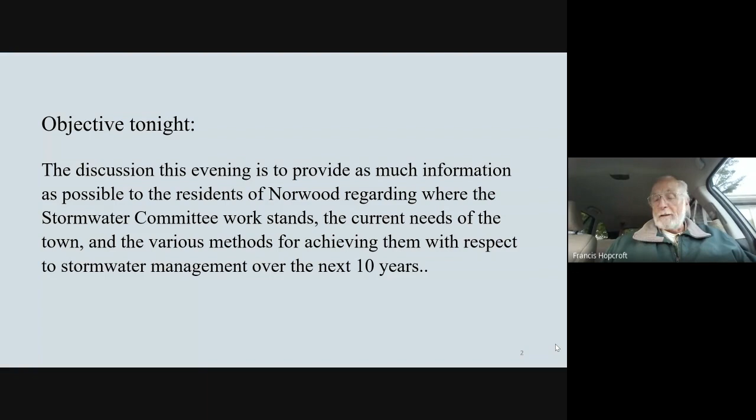So the members of the committee: myself, I'm a civil environmental engineer, registered in the Commonwealth. I've been registered in engineering and civil engineering since about 1972, in all 6 New England states at one point in my career. Heather is also a resident of the town and is a civil engineer.

Alan Slater is on the Finance Commission. Bob Donnelly is a selectman and also on the Capital Outlay Committee. Mark Ryan, the director of the DPW and town engineer, is a member of the committee. Holly Jones, conservation planner, Mike Rawson, the assistant town general manager, and we've had technical support and assistance from CDM Smith and Stantec. So that's the group that's been working to try to get this together.

Here is fundamentally the problem we're dealing with. If you look at the upper left of those 4 little pictures, you'll see that about 10% of what falls as rainfall onto natural ground cover, like undeveloped woodlands, is runoff. 40% evaporates, the other 50% infiltrates. That's really good. As soon as we start putting houses on and developing lots, even into lawns and gardens, we end up pushing that runoff up to 20%, and that reduces the evaporation and the infiltration.

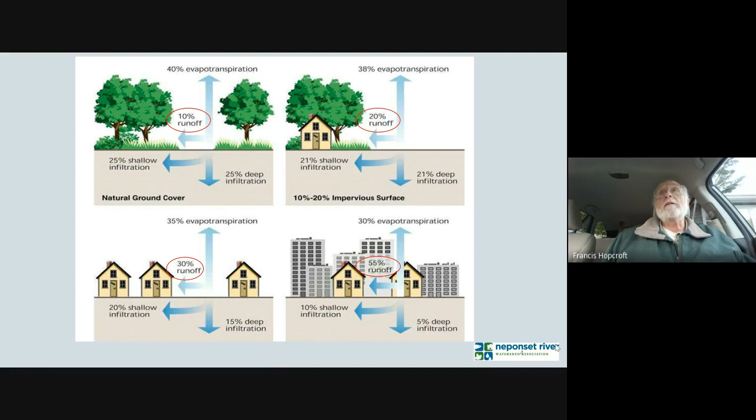As a point of perspective, when we talk about an area about the size of a standard soccer field, which is about 360 feet long, 225 feet wide, we're going to get over 12,622 gallons of water runoff in a quarter-inch rainstorm. When we make that pervious, even just a lawn, we're going to cut that to 1,260 gallons, 10% of what's coming off that parking lot. So it makes a really, really big difference in how much water goes into the storm drains and how quickly.

So impervious areas being increased with development is going to exacerbate the runoff, and waivers to land use planning and development projects also exacerbate the problem.

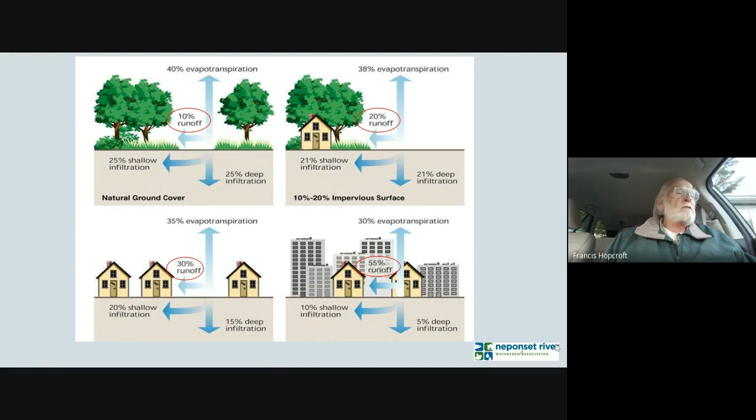There are some effects from all of that. We're going to have flooding, which we noticed the last time we had a major storm, about 3 years ago when the hospital was taken out. There was flooding underneath the bridge next to the public safety building, and a lot of flooding right downtown from Washington Street all the way down to Broadway and significant areas around there. That also causes significant economic hardship.

A lot of people had a lot of damage from that storm and had to repair it. Some of that is insured, not necessarily all of it. People who lost jobs because the hospital closed, businesses were disrupted - that's a lot of economic hardship on individuals. People's homes were flooded, had some disruptions. A lot of property was destroyed, and there was a lot of infrastructure damage in the town as a result of all of that.

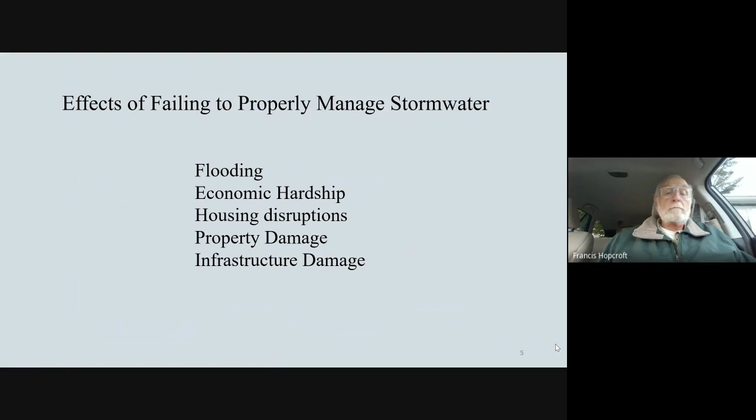In any event, there was a loss of livelihood for hundreds of people at the hospital and for some of those businesses, even if they only closed temporarily. There was a lot of loss of income for those places.

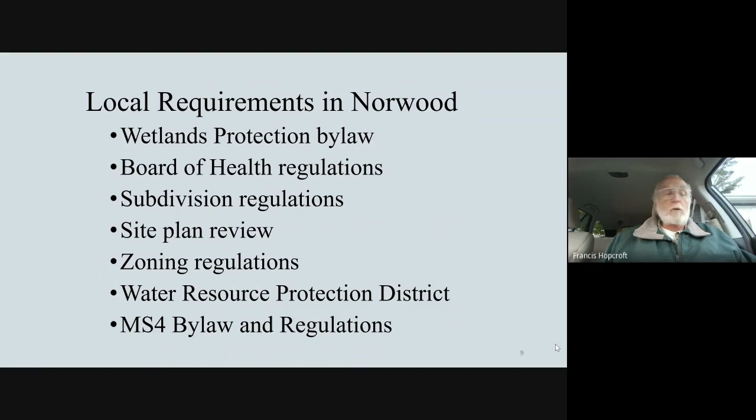The current issue: Norwood has identified a bunch of engineering solutions to deal with stormwater challenges, and those started with the original Stantec report, which was done a little over 20 years ago, and we have not implemented most of it. We now have to figure out a way to fund and implement those leftover projects and a couple others that have come up since then.

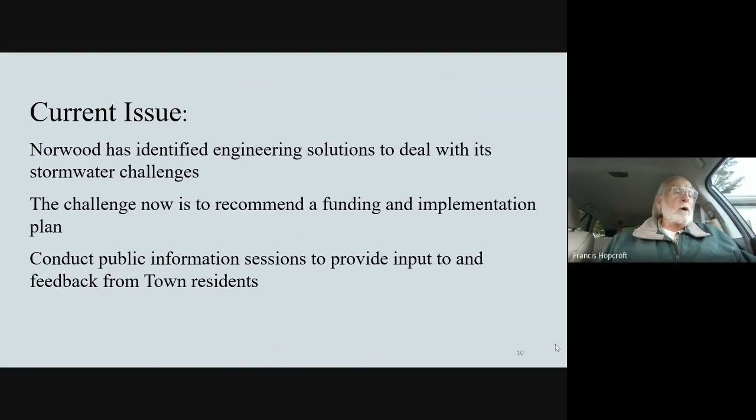We need to provide some public information, provide input to, and get feedback from town residents. Tonight is the first of those meetings, and we do want your input on these. It is important to note that homeowners, businesses, and the towns all have responsibility for effective management of stormwater. It is not strictly a municipal problem.

It's a big municipal problem, but we're not the only ones. As a town, we have to deal with it. Property owners and businesses do have a variety of options available to them, and some responsibilities along with those.

The first is to reduce impervious areas. If you don't need an impervious area, take it up. Don't build them in the first place if you don't really need it. If you're doing a patio, it can be done with patio blocks that let the water flow through rather than off.

You need to maintain appropriate, proper vegetative cover. Soil that does not have vegetation on it gets fairly hard when it's dry. Then the runoff is almost like an impervious area until the soil has time to saturate.

Sump pump discharges are a very big issue. We're not allowed to discharge directly into a storm drain in Norwood. There's no reason to dump it onto the driveway, which runs down to the curb and then into the catch basin and directly into the storm drain. That also is a no-no, and it should be removed.

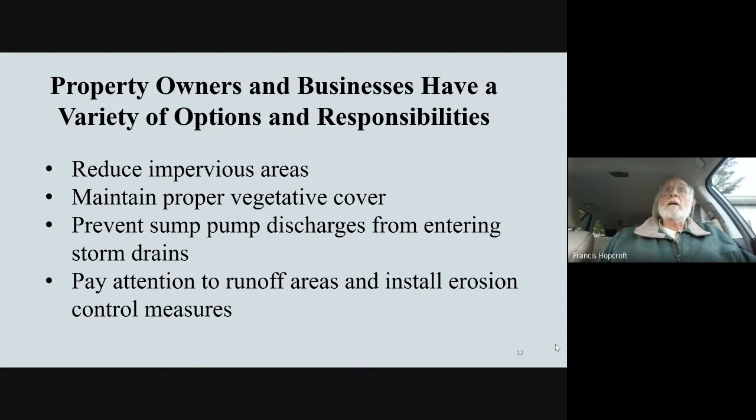Sump pump discharges should be discharging onto a lawn area that will not run off directly into the storm drain. Pay attention to runoff areas. Install erosion control measures so we don't create big gutters in the soil, which will direct water back into the streets. We need to pay attention to those things as we develop houses and do landscaping around the property.

The town does have some responsibilities. We need to provide and maintain adequate storm drain systems. We need to use swales, detention basins, rain gardens, and other low impact development when we do municipal projects and when we do planning for development projects. Those things reduce the runoff significantly.

We need to finish our development and implementation of the regulatory structures. We minimize deviations and waivers for existing regulations. I think I've said that about three times already tonight. It's one of my mantras, and it's a very important one to try to keep going.

There are a bunch of projects currently underway in the town. The DPW does operate and maintain existing catch basins and storm drains through its annual operating budget. Cleaning of storm drains and catch basins is a continuous problem, and it does have a significant piece of the operating budget dedicated to it.

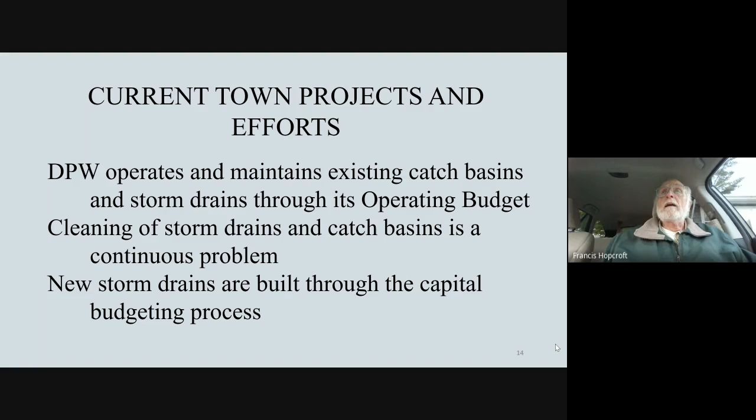New storm drains are built when the town has to do it through the capital budgeting process. When we have new developments, developers are required to install the catch basins and storm drains within that area to connect to the municipal system. But if we do it, it's a capital budget, and we all know capital budgets are tight every year. We have a very difficult time maintaining any kind of continuous flow. It's a very major problem.

The original Meadowbrook study was the last major study we did. There were about 9 major projects within that study. Only a very small number of partial projects have been completed. The first one was the connection from the public safety building in the Shores down towards the Hennessey Field system. There are a couple of smaller ones that were done over the years, but those are the only ones that have been done to date.

The Meadowbrook Channel project will be first. That one is going to be paid for through some ARPA money we have available. It's going to increase the channel below Murphy Field. Hennessey Field discharges into a pipe under Murphy's Field that then goes under Pleasant Street and discharges into the channel the Meadowbrook has been channeled into. Further down, the channel on Meadowbrook was enlarged by the Corps of Engineers a few years ago with work they did right at the Neponset River. So this Meadowbrook Channel project will increase the resilience of that channel, line it, and allow it to carry water more effectively into the area the Corps worked on, and then into the Neponset River.

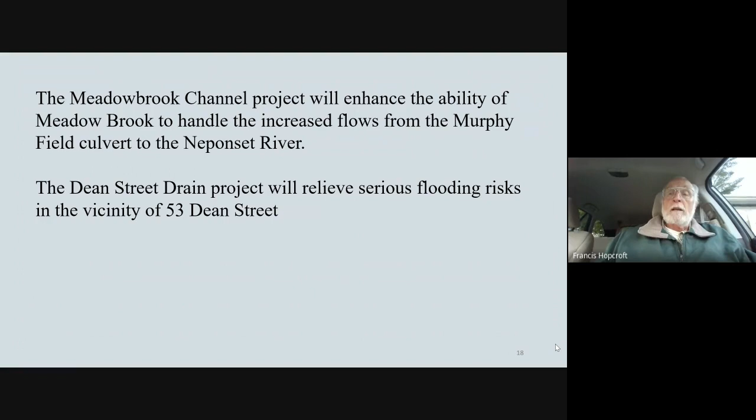Once we get that channel done downstream, then we need to deal with the Hennessey Field and Murphy Field project. We'll have a presentation from Stantec on both projects. Basically, the Hennessey Field project is a detention basin in the existing low area on the western edge. The reason is we cannot discharge more into the Neponset River than we do now, because that will cause downstream flooding. So we have to slow down the rate of water getting into the Neponset, and have big enough channels to optimize them.

The Murphy Field work will take water from the Hennessey Field holding basin and discharge it into the revised channel in Meadowbrook. Notice that the Murphy Field work will not disrupt the playing fields. Those pipes are outside the playing fields, between the playing field fences and Pleasant Street. We'll see that a little later on as well.

We'll then look to Guild Street. That picks up most of the runoff near and around the hospital site and the post office, and crosses under the railroad tracks at Guild Street and Broadway, ultimately connecting into the Hennessey Field system. Again, we're working from downstream upstream to get the best impact. The Broadway and Nahatan Street system picks up the water generated northerly and easterly of Guild Street within the Meadowbrook drainage area, and conveys it also to Hennessey Field, and then to the Neponset River.

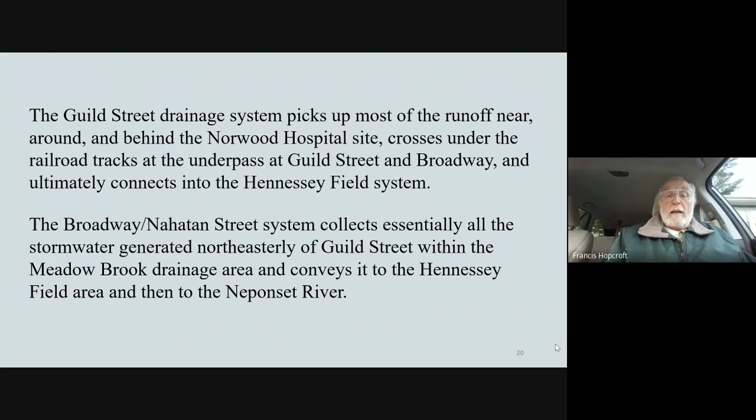Jacobsen Drive is a little north of Dean Street and west of Pleasant Street. It's a low area development that floods regularly. That will pick up the system there and tie it back into the Guild Street system, then into the one that goes under the bridge, and then into the Hennessey Field structure.

East Hoyle and Washington Street handles the areas north of Washington Street and north of Walpole Street, up Winter Street. It brings all of that water down into the same system. So there's a lot of water that goes into that Hennessey Field, Murphy Field, Meadowbrook system. And we have a lot of work to do to make that work efficiently and effectively without flooding people downstream on the Neponset River.

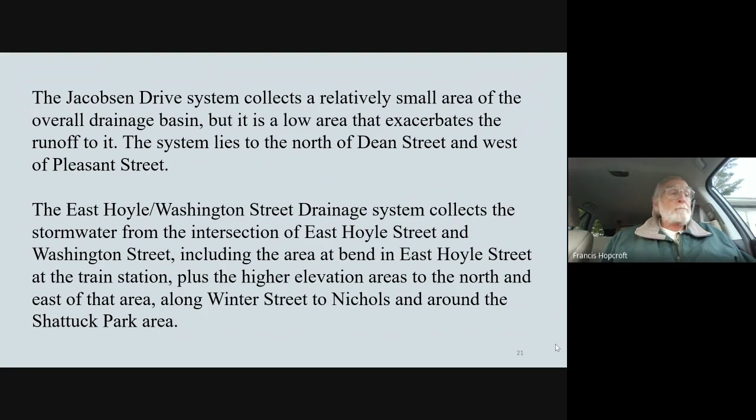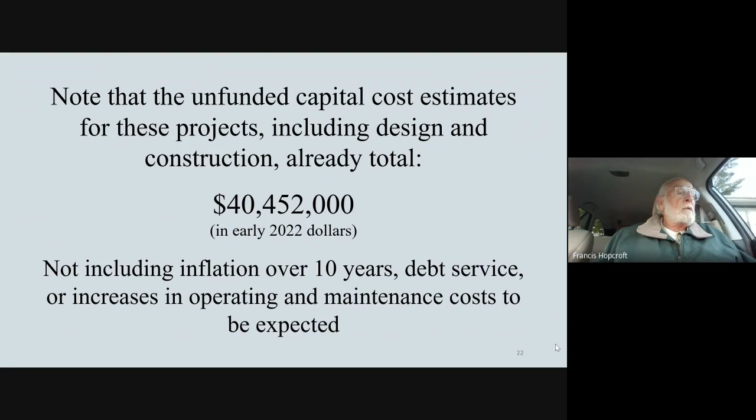One of the things we'll notice is the unfunded capital cost estimates for these projects—design and construction only—is over $40 million. That does not include inflation over the next 10 years, does not include debt service, does not include increases in operations and maintenance costs. So there's a lot of money coming down the road in the next 10 years to get these projects done. That's why we have such a significant issue in trying to figure out how we're going to get that done and how we're going to fund it.

What do we get for all that money? We get reduced flooding in the areas currently most susceptible to major inundation. The hospital is being built above grade without a basement this time. It is raised above all the water levels that occurred around it. That will not be a flooding issue again, but it could become isolated until we get these other projects done. The flooding we saw downtown will not be relieved until we get these projects done. The flooding in those other areas will not be relieved until we get these projects done.

This will reduce the risk of public safety buildings being isolated and inundated again, and minimize the risks for residences and businesses that have seen more frequent flooding—and there will be more frequent flooding as time goes on. We're looking to provide protection from projected storms for the next 75 years. Not all storms, but storms of the magnitude we just recently experienced.

Those storms will have bigger flows for the same design storm than we do now. Notice that all of this work will still not eliminate all flooding from all storms, or even fix all the known smaller flooding issues. So there will be more work and more projects coming down. We're in this fix now because we ignored a lot of these projects for the last 10 to 20 years. It is all coming back. Now we have to deal with it. And that's where we're at.

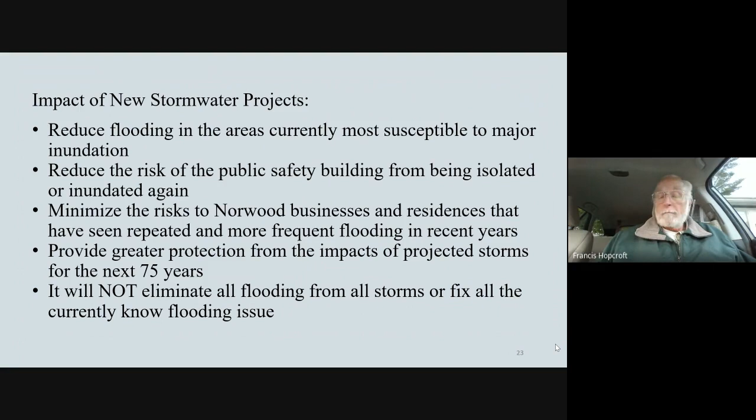We have to do something. There are some ways to finance all of this. Three of them are realistic, or at least realistic enough to be considered. The first is to continue financing all of these projects through the normal capital outlay process and the operating budget. You already know that's not going to work. We tried to do that already for the last 10 years. It hasn't worked out real well, as we've noticed recently. We're going to look at that again. That's going to be a very difficult thing to do without cutting way back for all the other municipal services that we provide. Same thing with the debt exclusion override. It impairs the ability to borrow, and it changes our rating for borrowing.

The third alternative is assessment of a separate stormwater management fee, which would be associated with what we call an enterprise fund, similar to the way that we do our water billing now as a separate fee. It's not part of the Public Works Department fees. Our sewer system and our sewer fees are done the same way. The light department is done the same way. So we're looking at the option of creating a separate enterprise fund in order to provide a separate management fee. We do not yet know the order of magnitude of that fee. It's going to depend upon what we put into the fee in terms of capital funding, only capital funding plus O&M, capital funding plus O&M plus management.

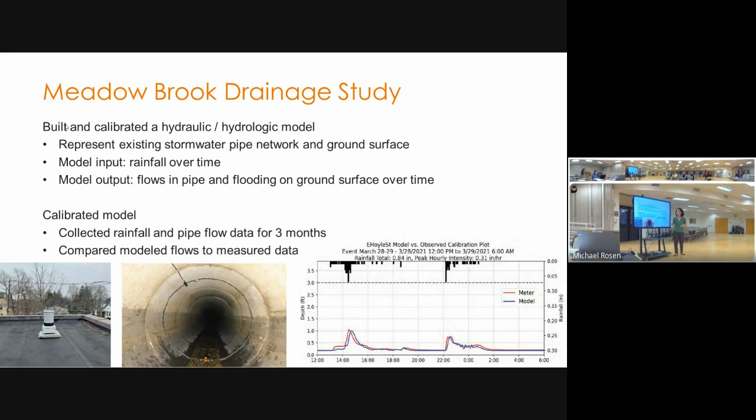So with this study, we did update the 2004 study, but by and large the drain system is the drain system, and the main branches are in the same location. So a lot of the projects that came out of this were very similar to 2004, but the difference is this study also looked at rain events considering climate change, because you don't want to build something and have it be obsolete in 10 or 20 years. We know a lot more about climate change today than we did in 2004, so the storms we designed for in this analysis were a little bit bigger because that's what we're expecting with climate change.

So we have a design storm, projected to the year 2070, a 10-year rain event—which doesn't mean it happens once every 10 years, but over a long-term period you can expect the frequency of returning to be 1 in 10 years. It could happen 2 years in a row, like rolling a dice: you have a probability of 1 in 6 of rolling a 6, but you could roll two 6s in a row. So this doesn't tell you how often it happens, just the probability of it happening. Then we evaluate how much flooding occurs in key neighborhoods that Mark was talking about.

So when we look at the flooding on the ground that comes out of the model in that event, we try to identify what we can do with the pipes to convey water away from those neighborhoods more quickly. We modify the pipes in the model, say upsize one of the main branches of the sewer, and run it again to see if the water clears out of the neighborhood more quickly, if the flooding goes down with the same design storm, and then look at how flooding changes.

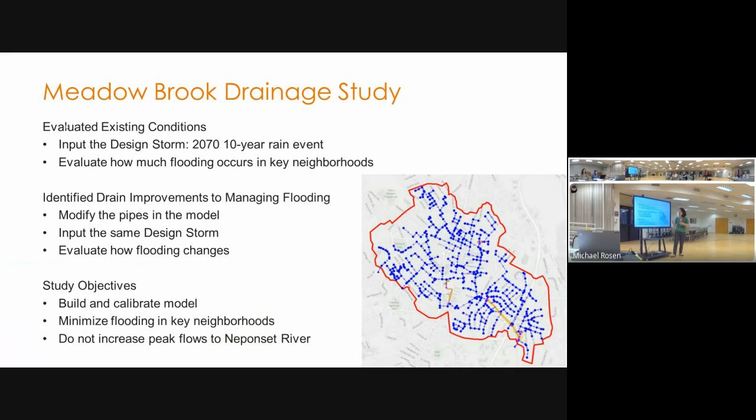So we came up with these projects that were spoken about earlier, that Jerry talked about. Each of these red rectangles represents a project, and you can see they follow the main branches of the system through Hennessey Field, coming from the south, down to Murphy Field, down to the Neponset River, and down to Meadowbrook, which then flows into the Neponset River.

By its nature, when you take flooding off the street and put it in a pipe, to the extent possible you want to infiltrate it. But when it's a big storm, like a 10-year storm event, there's a lot of water. So when you put it in a pipe, it moves away from the neighborhood, but it moves downstream faster. Because we can't just dump it all into the Neponset River at a much higher rate of flow, the town needs a place to store the water so we're not increasing peak flows into the river.

Hennessey Field, the reason it keeps coming up study after study, is because it's right here, and it's so ideally located for draining the system and having a place to store water. It's town land, so it's just the natural place for a project like this.

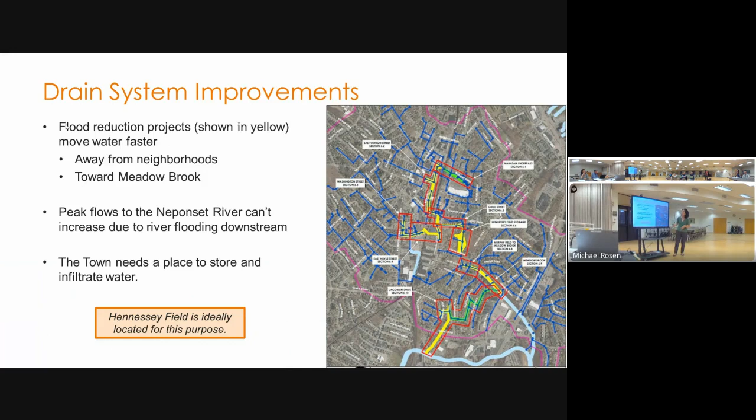I'm going to go through a quick description of Meadowbrook, and then take a minute longer on Hennessey Field. This is the Meadowbrook restoration. Here's Murphy Field, and here's Hennessey Field. Here's the Murphy Field ball fields, and then there's a culvert under here, and the culvert dumps out into the head of Meadowbrook, and it comes down to 6th Street, down to Dean Street, down to the Neponset River.

From here downward, this was already improved in the 1990s, I believe, by the Army Corps of Engineers. But this section was not touched. So this section is effectively a bit of a bottleneck in that it's narrower, and frankly it's fallen into disrepair. You can see right here, this is Meadowbrook flowing this way, and there's tree debris, accumulated sediment, and undercut banks. So there are improvements we need to make to turn this into a functional part of the drainage system.

So the objective is to stabilize the banks and improve conveyance. We looked at an Army Corps approach, which would be like a 10-foot wide base, 2-to-1 slope channels, all concrete, and it didn't feel right for the town. So in our discussions with the town, we're looking at localized treatments, where when we see a severely undercut bank like this, we might cut it back a little bit, clear trees hanging on by one thread, and stabilize that bank, but maybe not a uniform design all the way down the channel.

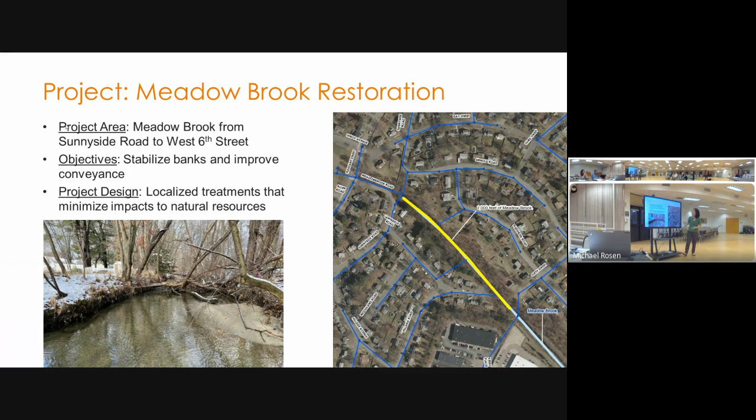The other project I'm going to spend a little more time on is the Hennessey Field stormwater storage. The project area is Hennessey Field, and the objective is to store and infiltrate stormwater in large storms.

The project concept is there's a large pipe that currently flows through Hennessey Field. It would be to daylight that pipe and essentially create a creek, so right now the stormwater system, the drain system, often has a little trickle in it just from groundwater coming in over time.

In a storm event it would convey as a brook would. But then to use the slope of this property - it's really high uphill and slopes down to the ball field - we'd cut it in a little bit and build it up a little, creating more of a wide spot in the line, so that when there's a big storm this can fill and buffer and prevent too much flow from going to Meadowbrook to the Neponset River.

This was also seen as an opportunity to add recreational amenities. If we're going to do a big resurfacing project here and make it a natural landscape, there's a lot of opportunity for education, recreation, gathering spaces, things like that to improve the property's use to the community.

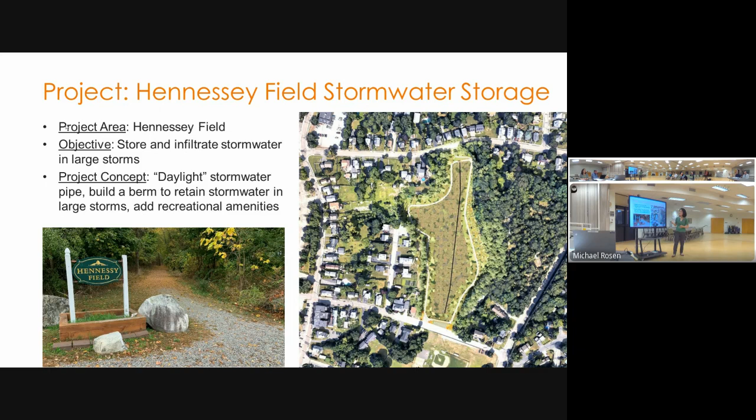So what does that look like? Here's the cross street entrance, and here's the Lenox Ave entrance. We're talking about having a relatively flat recreational trail all along the basin edge, which would connect into existing trails already on the site.

We're talking about something like a pollinator garden, some habitat here that could improve pollination. This would be a berm with a spillway and some seasonal landscaping at the entrance. Here's the daylighted stormwater channel and the connection to the pipes underground that go out to Meadow Brook, and this whole dark green area is the basin for stormwater storage and infiltration.

So maybe if we had a 10-year storm, it might fill it up. If we had a 2-year storm, it might overtop this daylighted channel, but it would be in a natural landscape and be able to infiltrate over time.

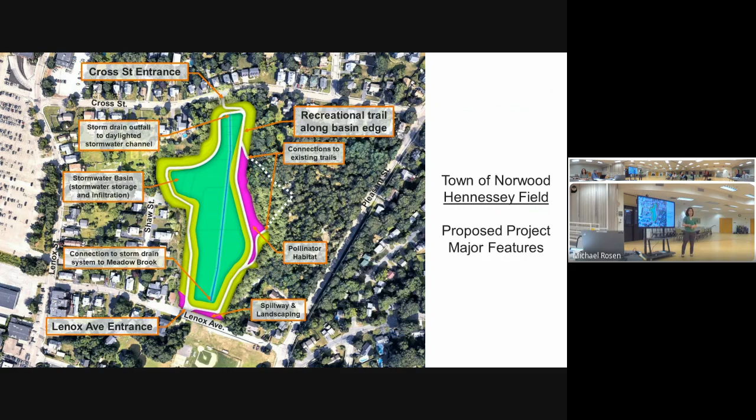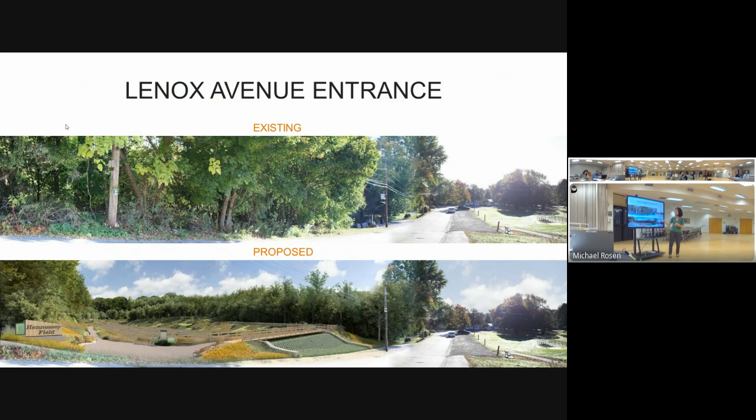One of the challenges with conceptual work, even a cost estimate, is you have to make a lot of assumptions about what you'll encounter in the design process. There would definitely be an effort to survey the whole property, understand what's to be removed and where, and how much ledge is impacted, since that's much harder to excavate. But we didn't have that detailed information at this early stage to make those specifics.

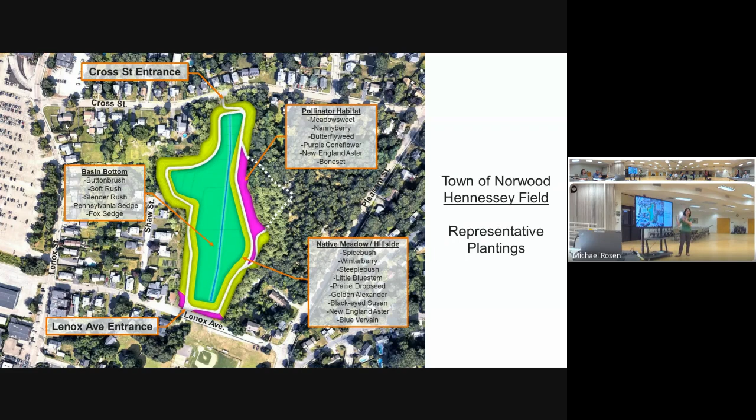You can even see it in the Google Earth here - up the hill there's a little mound that has a lot of ledge in it, which we've seen just walking on these trails. So we tried to avoid that. In an ideal world we'd use the whole property to get more storage, but we tried to be practical and avoid those areas, while knowing there's ledge throughout, so that's a consideration in design.

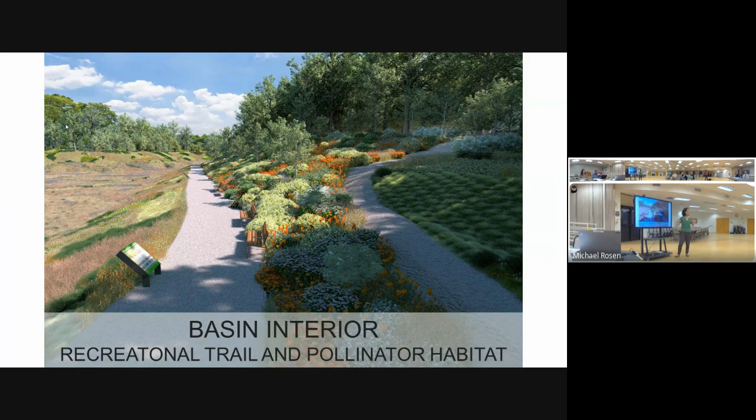Here's a shot from the basin interior. This is right at the pollinator garden where the trails fork, and then this joins up with the existing trail. This is just a sample of what a pollinator garden could look like, with some educational boards about pollinators and habitats and stormwater infiltration.

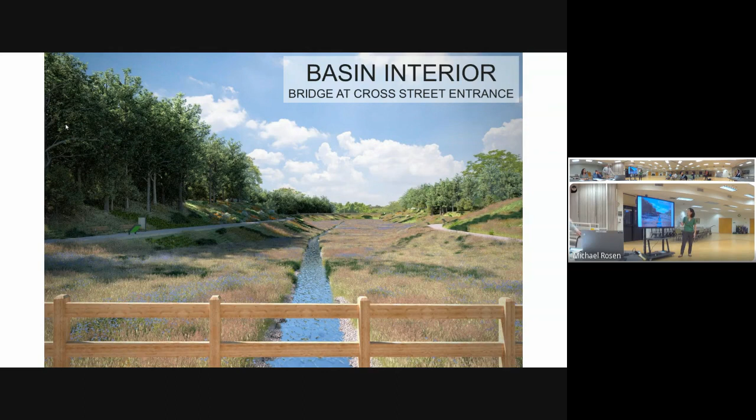And then this is up at the top at Cross Street, when you're standing on top of the daylighted stormwater pipe - you might be looking at this view of the basin, with the berm at the bottom to hold the water. Just a couple of snapshots to give examples of the vision of the project, since this is probably one of the more critical pieces of the stormwater system, and also one of the more expensive pieces. So happy to take questions.